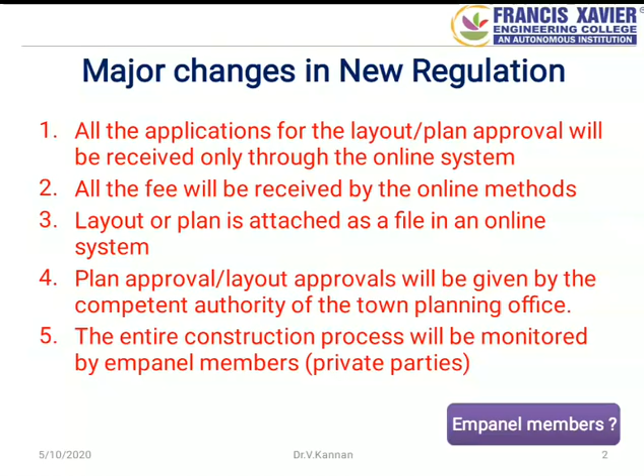This is the general structure for the layout or plan approval process. The district-wise competent authority is appointed by the Principal Secretary for Housing and Urban Development, Chennai. The Principal Secretary only frames the rules and regulations, and they will be executed by the district-wise competent authority. I already told you competent authority means the director of the town planning office, which is situated in every district headquarters. Okay.

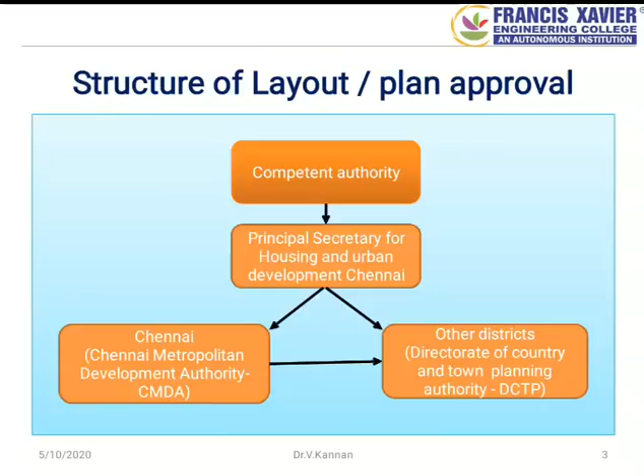Now I will explain who the empanel member is and their roles and responsibilities. The empanel member is a professional, that is, a qualified BE or ME candidate in civil engineering, appointed by the competent authority. They monitor the construction activities according to the Tamil Nadu Combined Development and Building Rules 2019 in every stage of construction. There are 4 categories listed here: first is registered architect, second registered engineer, third structural engineer, and fourth construction engineer.

The qualification for each empanel member is also mentioned here. For registered architect, you have to complete Bachelor of Architecture. For registered engineer, you have to complete BE in Civil Engineering. For registered structural engineer, you have to complete Master of Engineering in Structural Engineering specifically. For construction engineer, you have to complete BE Civil Engineering. If you have a BE or ME degree in Civil Engineering, you are eligible to become an empanel member. A formal interview will be conducted by the competent authority. If you fit, you will be appointed as empanel member for a period of 5 years. Then you can renew.

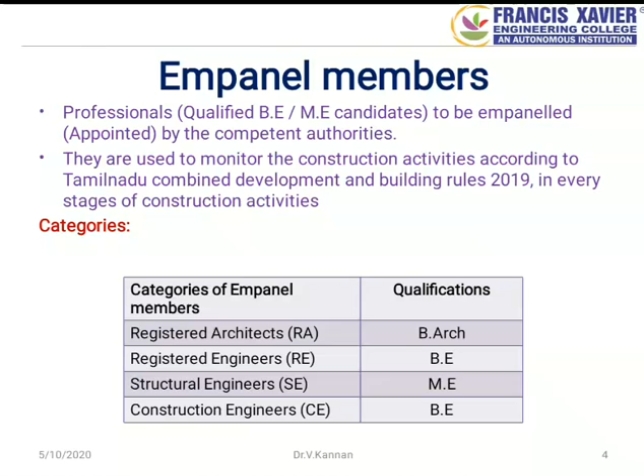So, in this slide, the main roles and responsibilities of the empanelled member are presented. The first responsibility is they shall study the local act, rules and regulations and standing orders approved by the competent authority. That means you have to know the current rules and regulations for the construction process.

Next role is they shall prepare and submit all plans in a neat, clean and legible manner. So your plan must be errorless. Next, they shall submit plans, documents and details without any scratches or corrections. Also, site conditions shall be correctly shown.

Next one is the registered architect or registered engineer and the structural engineer shall be responsible for adhering to the Indian standard specifications. So, you have to know the specifications of the Indian standard codes for the construction process.

Next responsibility is in the event of any deviation, the registered architect or engineer is solely responsible to bring it to the notice of the competent authority. It means if there is any error, you have to inform the competent authority immediately. Okay.

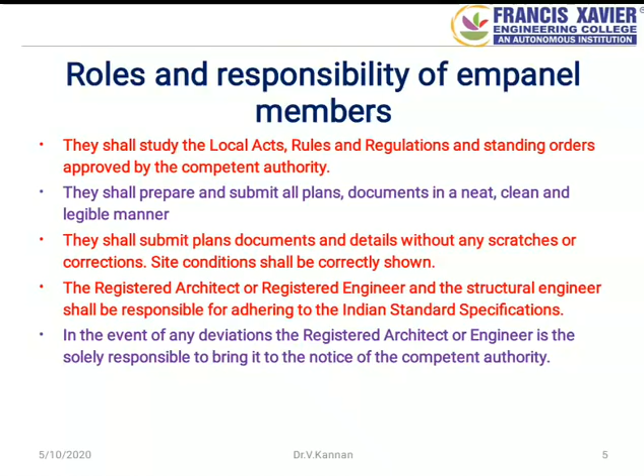So now I move on to the type of location and building. According to the new regulation, the location of the plot is classified into 3 types. First one is continuous building area, second one is economically weaker section area, third one is other area. Continuous building area means a building constructed without any side setback, including row type of housing. It means between 2 houses there will not be any gap. So it will be constructed by the common wall system. That is called continuous building area.

Next one is economically weaker section area. It means this area is declared as a slum by Tamil Nadu Slum Clearance Board or categorized as EWS, that is economically weaker section area. All other areas may be called other areas.

Next, the type of building. According to the new regulation, the building is categorized into 2 types. One is non-high-rise building, another one is high-rise building. If the height of the building is less than 18.3 meters, that kind of building is called a non-high-rise building. If the height of the building exceeds 18.3 meters, that kind of building is called a high-rise building.

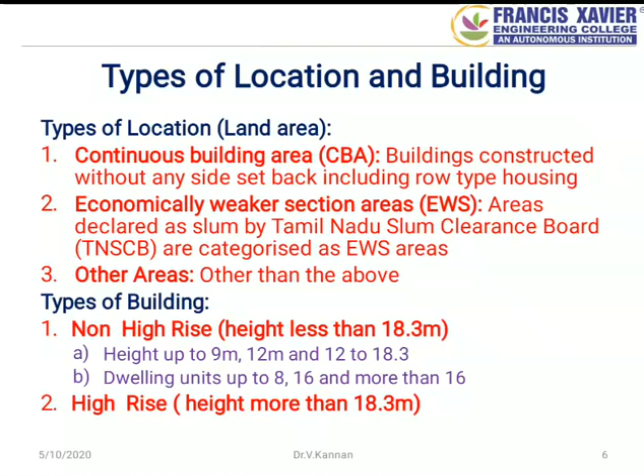Now, the important part I am going to tell you: planning parameters. There are 11 parameters for the construction of non-high-rise buildings up to 9 meters height. They are minimum plot extent, minimum plot width and frontage, third one is minimum road width, fourth one is maximum height of the building or dwelling units, maximum floor space index, maximum plot coverage, seventh one is the front setback, next, side setback, rear setback, and open space reservation and passage.

If your building height exceeds 9 meters, different guidelines are given and that should be followed. In today's presentation, I am going to explain the current rules and regulations for buildings having a height of 9 meters. So before preparing a building plan for approval, you must know these parameters. Then only your plan will be approved without any delay. If your plan does not conform in any one of the parameters, your plan will be rejected. Okay, I will explain one by one.

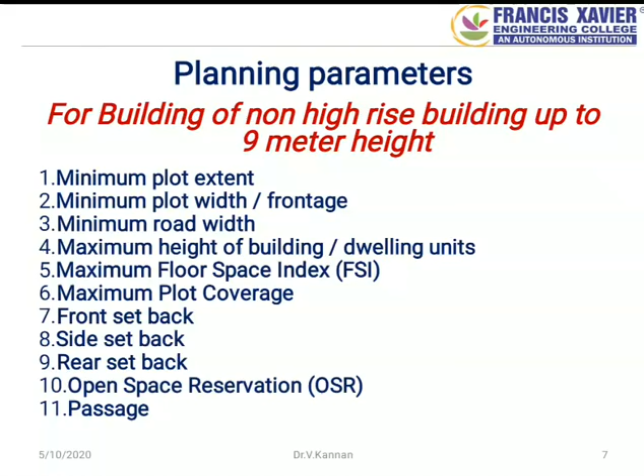The first parameter is minimum plot extent. Extent means area. So as per the new regulation, if your area is in Natham or a declared economically weaker section area, that plot area must be higher than 80 square meters. In other areas, the plot area must be higher than 220 square meters.

For easy understanding, I am showing a recently approved layout. From that layout, I am taking plot number 19. Just look at plot number 19. The area is 306 square meters. According to the new regulation, your plot area must be higher than 220 square meters. So we can purchase this kind of plot for construction purposes.

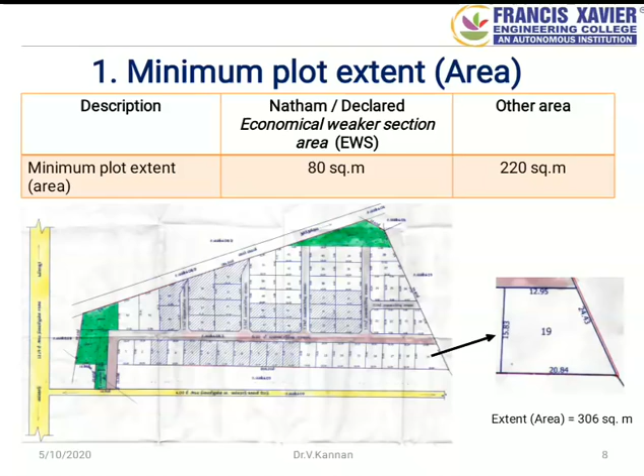So the next parameter is minimum plot width or frontage. Frontage means the width of the plot facing the road. So according to the new regulation, in Natham or a declared economically weaker section area, that width must be greater than 4.5 meters. For other areas, it must be greater than 6 meters.

Just look at the figure. The frontage is 12.80 meters. So it is higher than the new regulation value. So you can use this plot for the construction.

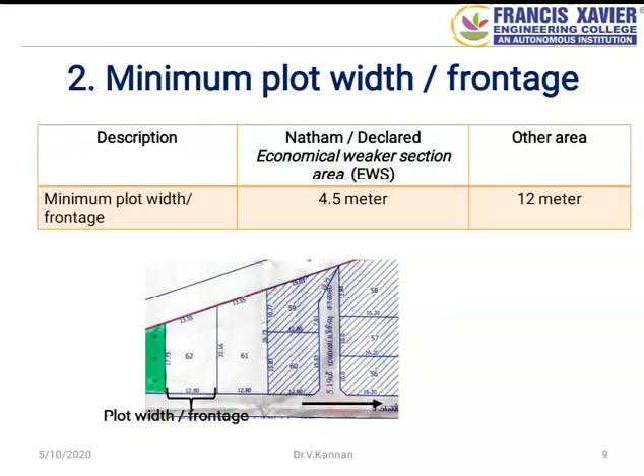Next parameter is minimum road width. You know road width means the cross-sectional width of the road. So as per the new regulation, for continuous building area, your road width must be higher than 3 meters. For economically weaker areas also, the width of the road must be higher than 3 meters. For other areas, road width greater than 3 meters up to 6 meters is one category. Above 6 meters is another category in the other area layout.

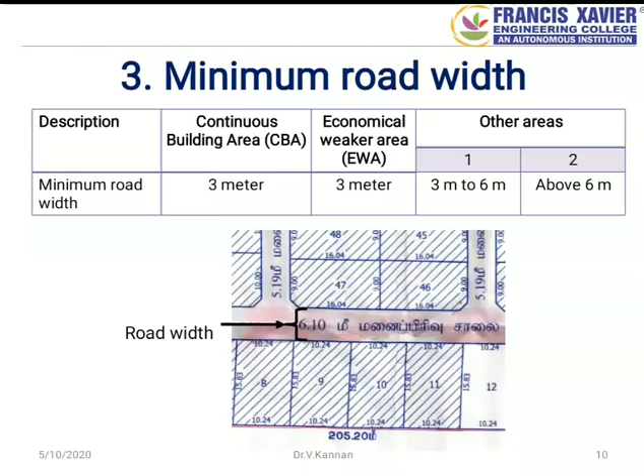The next parameter is maximum height of the building or dwelling units. Maximum height for continuous and economically weaker areas is 12 meters. So your building height may be up to 12 meters. Otherwise the plan will not be approved.

For other areas, in the first category, that is 3 meter to 6 meter road width category, the maximum height of the building will be 9 meters. For the second category, that is above 6 meter road width, your building height may be extended to 12 meters.

Next, the maximum number of dwelling units for commercial use. First you have to know what is meant by dwelling units. Dwelling means a house, or a group of houses in a single building, that is an apartment. For continuous building area or economically weaker area, the dwelling units may be 16. For other areas, in category number 1, up to 8 dwelling units may be permitted. In category 2, up to 16 dwelling units may be permitted.

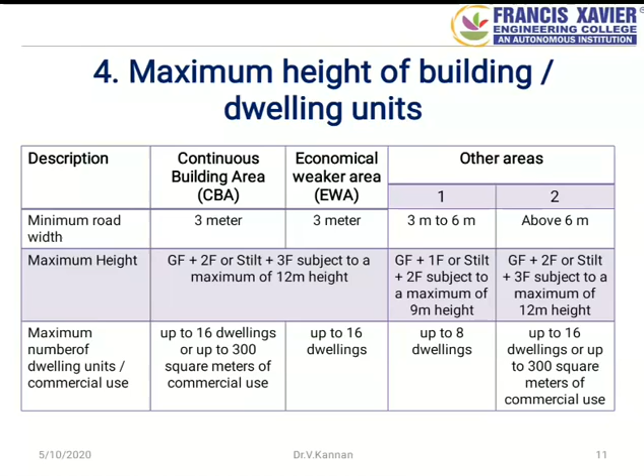The next parameter is maximum floor space index. It can be calculated by a simple formula, that is a ratio between total covered area on all floors to the area of the plot. According to new regulation, it must be less than 2.

For example, I am showing a simple figure. The outer boundary is called plot area, and the inner one is building area. Your building has 3 floors, that is ground floor, first floor and second floor. First you calculate the area of the plot, that is 216 square meters. Next you calculate the area for a single floor, that is 9 meter into 12 meter, and multiply by 3, since 3 floors. You will get 324 square meters.

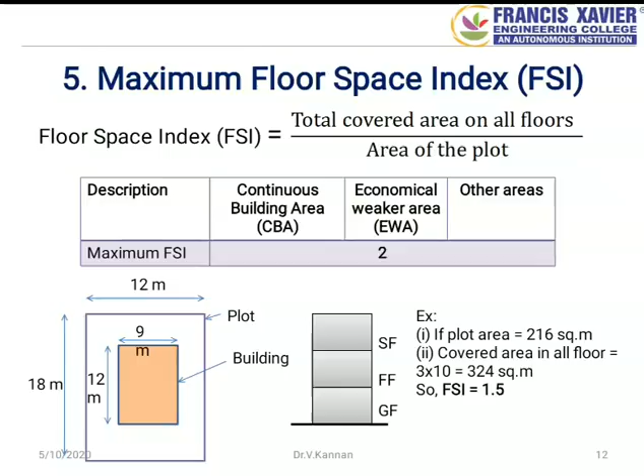Then you can easily calculate the floor space index. For this case, floor space index is 1.5, which is below the new regulation value of 2. So we can use this kind of building and submit the document or application for plan approval.

Next parameter is maximum plot coverage. It can also be calculated by a simple formula, that is ratio of maximum built-up area at any floor divided by the plot area, into 100. It will be in percentage. For continuous building area and economically weaker area, it must be less than 50%. For other areas, it must be less than 40%.

Again I am showing a simple example. From this example, we can calculate the maximum plot coverage. According to this example, your plot coverage is 50%. So you can build a house in continuous building area or economically weaker area, but not for other areas. You have to know this, otherwise you have to change the dimensions of the building. Then only your plan will be approved.

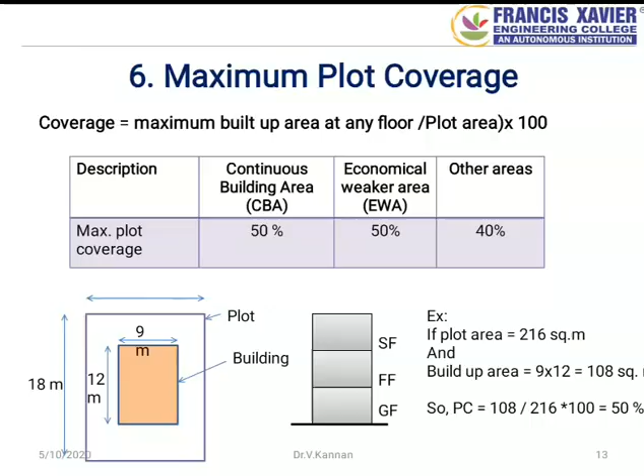The next parameter is setbacks. Setback means the empty land distance between the road and the building, called front setback. If the empty space is between the boundary and the side of the building, it's called side setback. If the empty land is between the back side margin and the building, it is called rear setback.

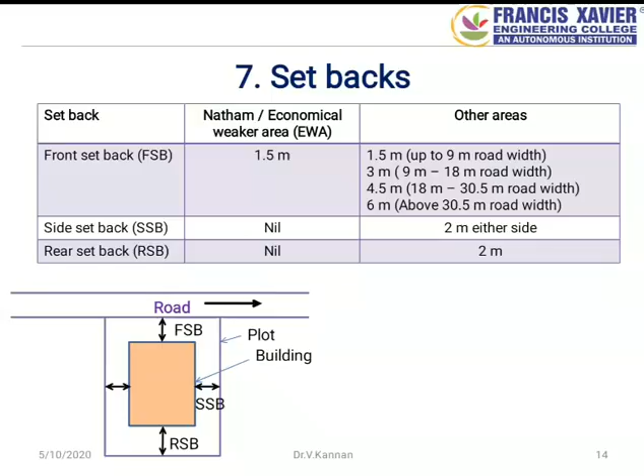Next parameter is open space reservation. To allot the open space reservation, excluding the space for road allocated within the layout, OSR is given for the public park, usually about 10% of the total area of the layout must be left. You have to check this before purchasing the plot.

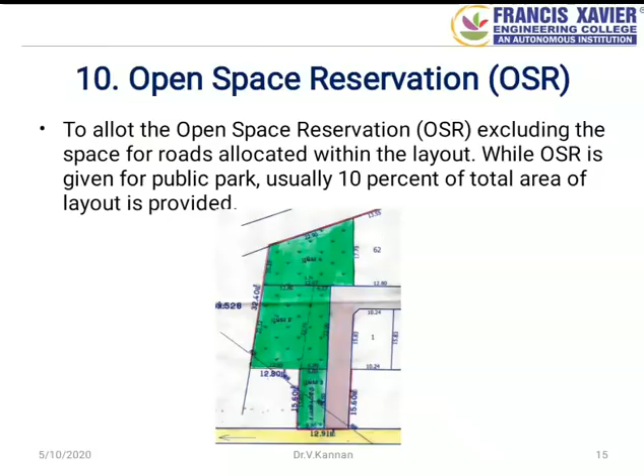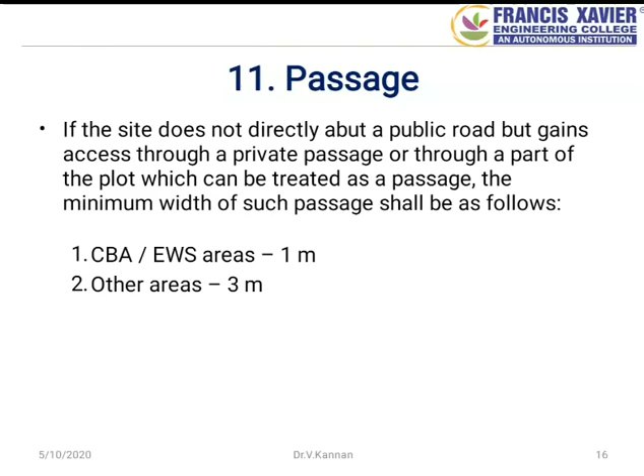Next important parameter is passage. If the site does not directly abut a public road but gains access through a private passage or through a part of the plot treated as a passage, the minimum width of such passage should be as follows: for continuous building area or economically weaker section area, it must be greater than 1 meter; for other areas, it must be higher than 3 meters.

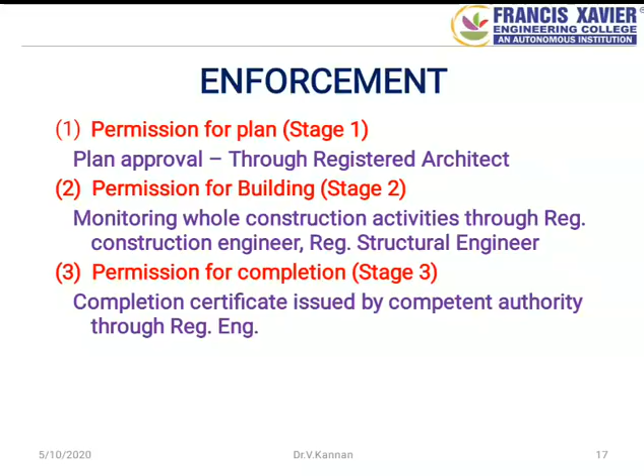So these are all the enforcements as per new regulation. First you have to get permission for the plan, next permission for building, and next permission for completion. These are the 3 important stages of building construction now set by the Tamil Nadu government as per new regulation.